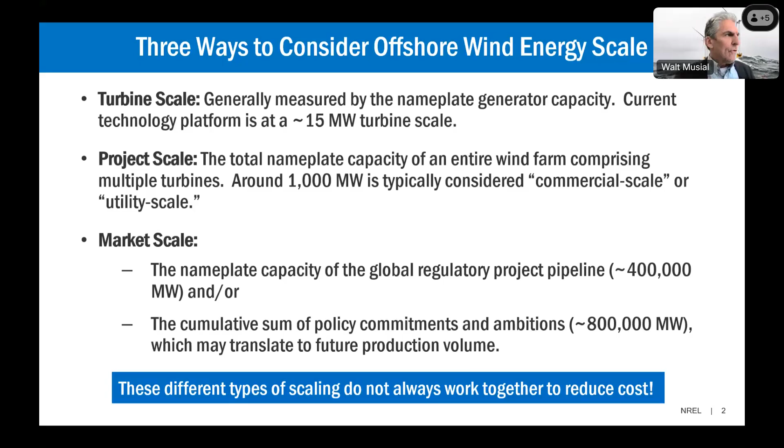The first one I'm going to talk about is turbine scale, and maybe touch on the history quickly—I could spend a whole hour talking about the history of turbines because I lived through a lot of this. But this slide reminds us that we've done a lot of upscaling, and the upscaling that happened in the past has been amazing.

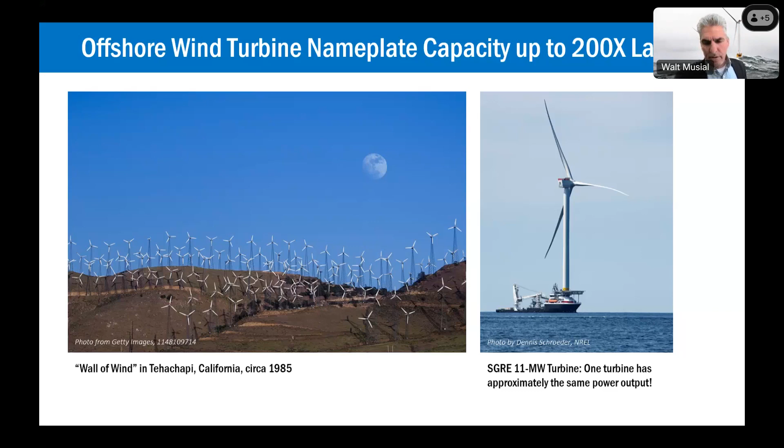Looking back at land-based wind, this chart on the left shows the capacity size increase of land-based machines. It does look like the machines keep increasing over time, but those increases have been fairly marginal, and the scale settled out around 2 megawatts. As shown in the picture on the right, the infrastructure to move large components to build land-based wind farms was constrained by bridges, the road system, and the cranes needed to install those machines. So we leveled out around 2 megawatts, though that increase has crept up due to optimization—slightly larger rotors, higher hub heights, and low specific power machines.

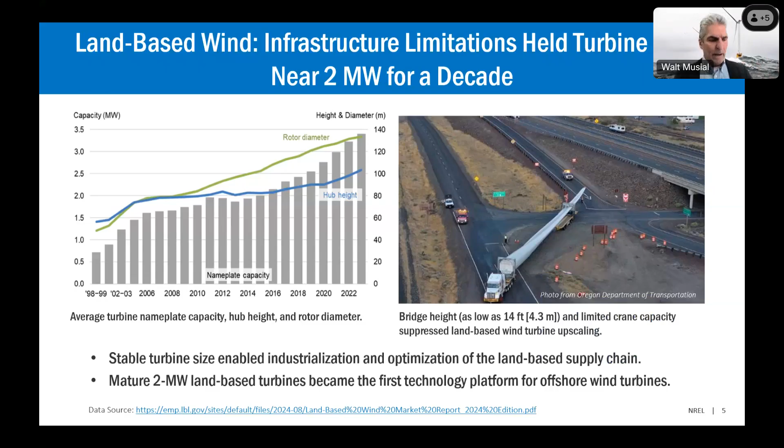That stable size allowed the land-based industry to industrialize and realize the maturity of the product lines they've been delivering. But those products also became the first technology platform for offshore wind machines back in the early 2000s. I'm going to talk about that concept of technology platforms for a minute.

For 24 years, since Middelgrunden, when 2 megawatt machines were deployed offshore in Denmark, we've been commercializing the 2 megawatt machines on the first technology platform—a definition NREL uses to think about the steps we take going from one configuration and size envelope to another. Our definition is really the envelope of turbine technology and the proportionate infrastructure and supply chain scales necessary to support the manufacture, installation, and service of that sector of the industry.

So if the turbine size increases, so does all that supply chain and infrastructure—it all has to happen in unison. The industry has depended on and relied on each other to go from one step to another. We have Platform 1, based on the land-based 2 megawatt machines, which grew to the Siemens 3.6 megawatt, one of the most prolific machines ever made.

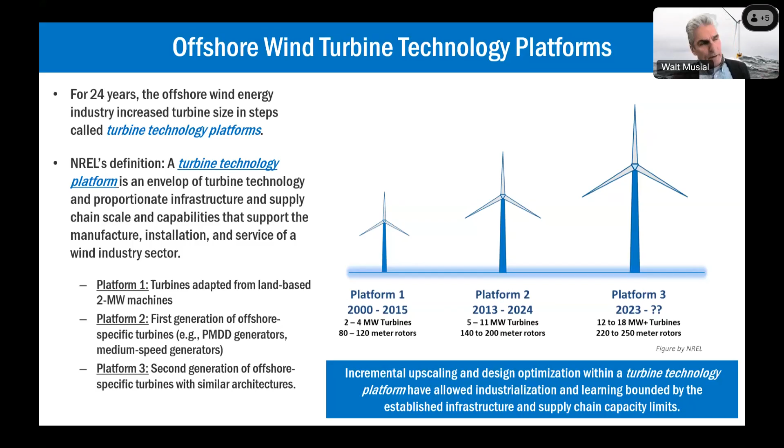You can see there's a parabolic relationship there that goes into the present day, where we're now approaching a point where all the projects are committing to these 15 megawatt turbines that are just reaching the commercial stage.

The caution here is that while land-based upscaling slowed because of land-based infrastructure, offshore we didn't have to slow down because there was no constraints until now, since the infrastructure is being built, but there are limitations to how that infrastructure can further be developed to increase for further upscaling.

In the United States, there's even greater limitations because we never built Platform 2 - we're starting from scratch to build the 15 megawatt platform. So a lot of that infrastructure is more expensive. And we have the Jones Act, which limits our options in terms of vessels - we have to have US-based vessels. So that Platform 3 turbine platform is still being built.

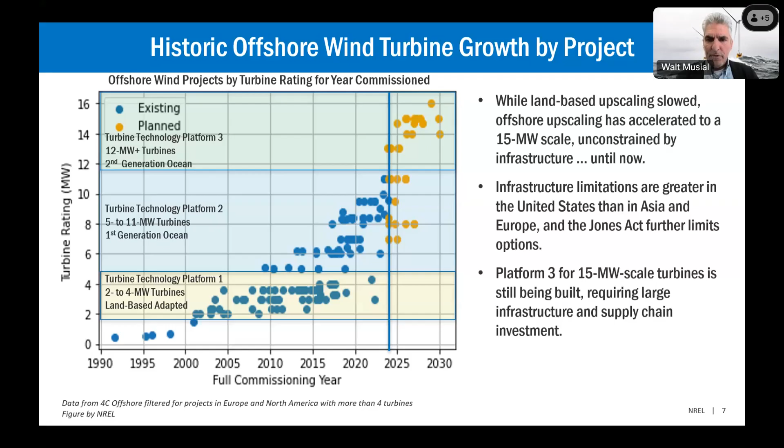And I need to make take my box away. Here it is. Sorry.

So we're still building this platform, and these are the turbines that are serving that platform. All the main manufacturers of turbines - Siemens Gamesa, GE Vernova, and the Vestas 236 15 megawatt turbine - are the main turbine manufacturers and turbines that will serve the projects of the United States in the next round of projects.

These turbines were enabled by technology advancements over the last two decades which we're all aware of. They aren't all wind energy advancements - some of them are just technology advancements with computer technology and lightweight materials, innovations in manufacturing, and load control from controls that we became proficient at, and diagnostics for remote sensing and things like that have all led to this generation of turbines, which we're building now and will serve the industry well, I expect, in the future.

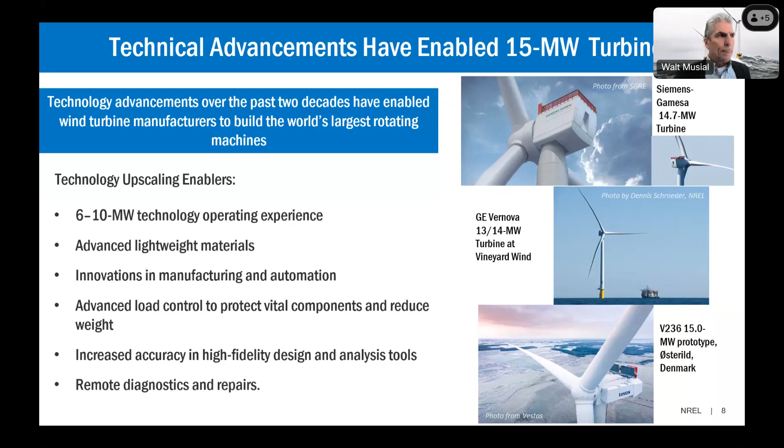We also see that these reduced costs help developers win competitive procurement bids by bidding in with the larger turbines, and this has been going on for 10 years now. In Europe and in the United States it's kind of following true, where the larger machines, even though they don't yet exist, are helping developers win bids because they can bid in with the larger machines at a projected cost, and then those costs get turned into the prices that are negotiated in the power purchase agreements.

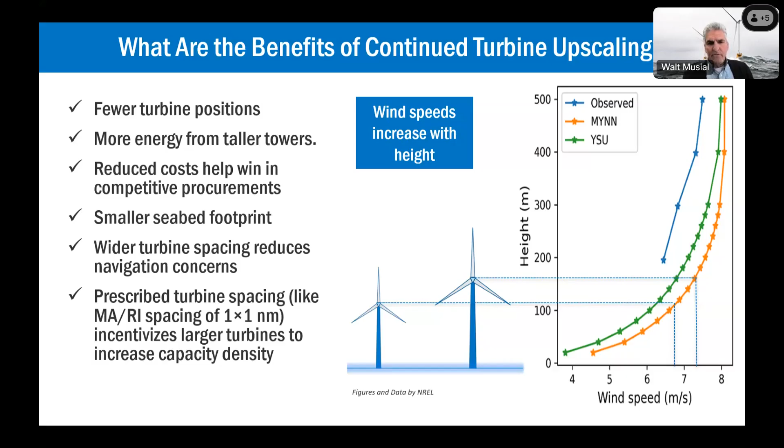We also see smaller seabed footprints, which means the turbines are wider apart, and some of the navigation concerns can be alleviated or mitigated, especially in places like Massachusetts and Rhode Island lease areas where turbine spacing was prescribed at 1 nautical mile. The larger turbines are the only way that we're going to increase the capacity density of the project, because the turbine spacings are fixed. So we're seeing that as a motivation to go to larger turbines.

But let me talk about what are the concerns of further upscaling. The first one is really talking about an old and well-known law of physics, called the square cube law. There was always this fear that because the turbine's energy output increases by the square of its rotor diameter, the turbine's weight is actually increasing by the cube of the diameter. So the turbine's getting heavier faster than it's making more energy.

That law of physics is being defied and offset by technology benefits that have been included in the development of these larger machines. But putting that aside for a while, as you get to larger and larger machines, we haven't found any hard limits that would limit turbine scaling, but there may be economic and practical limits that need to be considered. First of all, diminishing returns on reduced turbine positions means that as we get to larger and larger turbines, the percentage gained from going from one level to another is smaller.

We also see that the turbines might be getting more expensive because of the square cube law. The heavier turbines mean more expensive turbines, and we don't have good data on this, but that's one of the things to be concerned about.

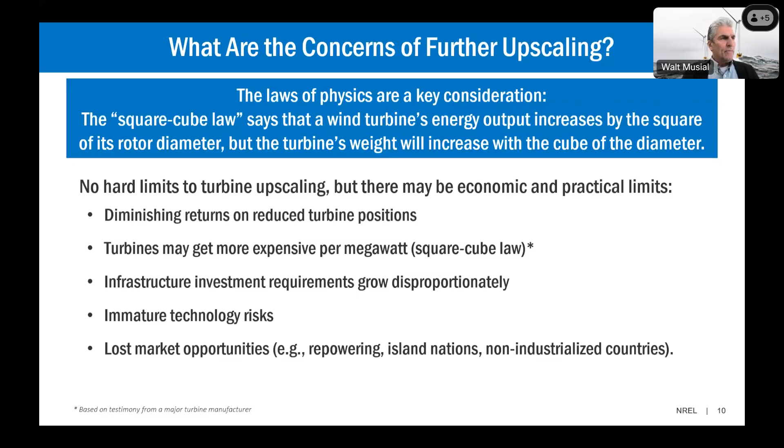So we may be limiting ourselves in some places where, if, say in 20, 30 years, we want to repower these foundations, if the turbines don't exist to do that, we can't reuse the infrastructure. Or island nations where they just don't have access to large ports, or non-industrialized countries where the development of those ports and vessels are probably unfeasible. So we have to consider that as we go.

This is an example of what I mentioned just a minute ago, which is the diminishing returns. You see that there's two lines vertically on this chart. One represents the 2 megawatt turbines that we started out with, and we came all the way to the 15 megawatt machines. Going through that upscaling, we gained about 7 times fewer turbine positions than we had at the start, say a Horns Rev type project.

That kind of gain was significant, and it resulted in a large capital benefit, as shown on the right. But if we go to a larger machine, say a 20 megawatt machine, the gains are just a fraction of that, and the risks can be a lot greater.

So I think my conclusion was that most of that low-hanging fruit has already been picked. We did really well getting to the 15 megawatt. The question is, should we go beyond that now, and is it worth it? There's a lot of reasons to consider that possibility.

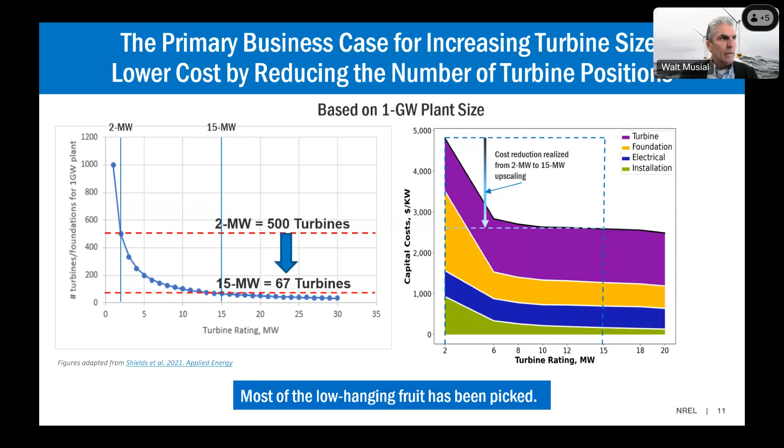One of the biggest reasons is the infrastructure costs. We're just kind of coming to terms with this right now, but all aspects of the supply chain are dependent on turbine size. It's not just the turbine itself. There's the port infrastructure, the regulations and standards that need to be updated, the service and operation equipment, and the grid and electrical infrastructure to some degree.

And then the manufacturing supply chain and the businesses that have to relocate and put their wharfs and access to the ocean into maybe expensive or less available real estate.

So in just one example, the Oceanic Network estimated that there would need to be $36 billion of investment going into ports and infrastructure to build this next platform of 15 megawatt machines in the United States. That's a substantial investment, and those are investments that are not part of the LCOE calculation that the developers have to make, and it's not under their control to make them. So we have to make the market appealing enough to investors for those $36 billion to come to fruition.

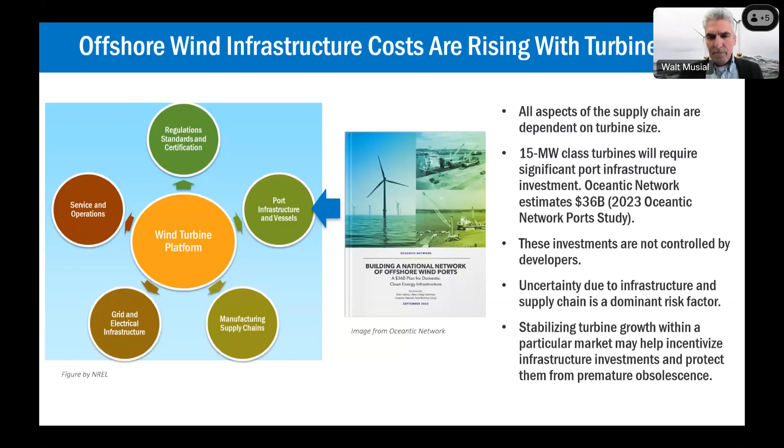So I'm going to use an example of another industry, which is the aircraft industry, to maybe use this as a cautionary tale. They've been working on jet airplanes for much longer than we've been working on wind turbines.

But the 747 was developed in the 70s, and we always thought, oh wow, imagine how large airplanes will be by the time we get to the 2000s. Well, that really never happened. The 747 didn't get any bigger, and the A380 was really the largest passenger commercial airliner.

Both of those jets have been discontinued because jumbo jets like this require large infrastructure to operate, and in particular, they required over 3,000 meters of runway space just to take off from airports, which limited where they could go. Smaller planes can serve regional airports where many passengers want to go, and the aircraft industry just wasn't able to fill the big jets. So the airport infrastructure favors the small aircraft.

But we still need the larger aircraft for other things like international flights, cargo, and to serve major hubs. In reality, what has happened is that the aircraft industry has moved to a diversity of aircraft to serve diverse global markets. If I just put up the fleet of United Airlines airplanes, they range from the 777, which is slightly smaller than the 747.

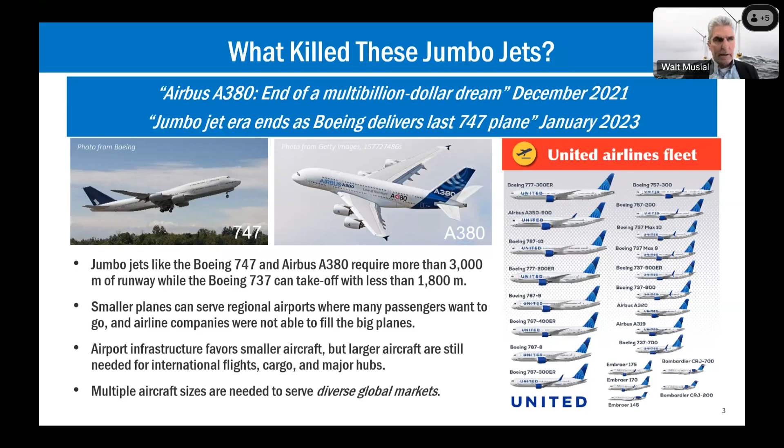So I'm going to move back to offshore wind. Here's another representation of the historic deployment of offshore wind turbines over time, representing the three platforms I just talked about. The yellow bars are the smallest platform, platform 1, adapted from land-based machines, the 2 megawatt to say 4 megawatt machines.

The blue bars are the platform that evolved from the first generation of offshore machines, starting with the 5 megawatt machine and up to arguably the 11 megawatt machines. The dividing line really was when GE deployed the first prototype in Rotterdam to start the process of the 15 megawatt class machines, which are the green bars. Most of that's in the future.

But also on this chart is the cost curve that shows costs were rising continuously until 2015, and then they started to come down, and we started to realize the benefits of this upscaling. But if we dissect it carefully, the commercialization of that 6 megawatt scale, platform 2, was partly responsible for generating that cost decline. But we also saw that the maturation of the supply chains for the 2 to 4 megawatt was really going.

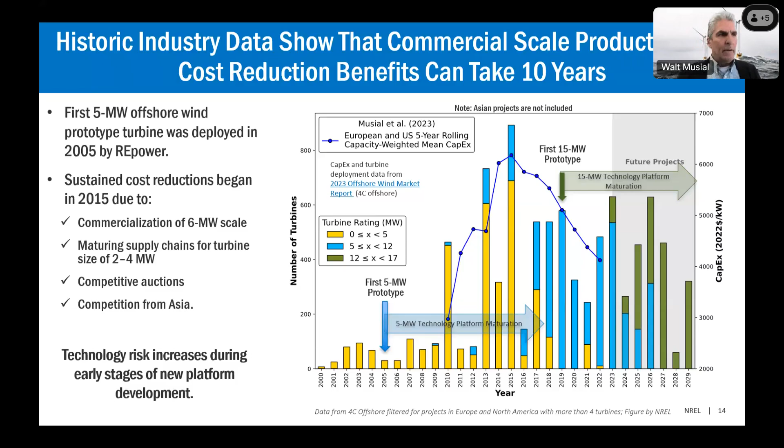We're kind of going through a process now where the 15 megawatt technology platform is beginning to go through that process of technology maturation, which started in 2019, and it's continuing now. Of course, we have the experience of the previous platform to build on, but there's still a lot of learning to do with the infrastructure, the logistics, and the turbine reliability that needs to still happen. And we'll be seeing that as we go.

So I want to talk about those technology risks in introducing new technology. New turbines are more likely to have design and manufacturing oversights or defects because they haven't been tried yet, and we're building all new factories with new workers. There's construction risk because there's new logistics, ships, and new ports that have to be developed, and the logistics depend on the on-time arrival of this new infrastructure as it's being built.

The supply chain is kind of the same way. You have new supply chain facilities that need to be built, and the vulnerabilities increase as the turbines get larger because the investments that have to be made into the supply chain and infrastructure system get greater. Now you have to locate those factories, which are much larger, on an ocean or body of water where you can ship them from, and the number of suitable manufacturing locations are getting more scarce.

So as you introduce this technology, the safety risk could also increase because there are situations that arise that are unforeseen, and those hazards could introduce safety risks as they have to be encountered without a procedure in place to deal with them. Operational risk is the same. You have field reliability problems that could arise due to the lack of understanding of the new technology, and those could result in higher failure rates.

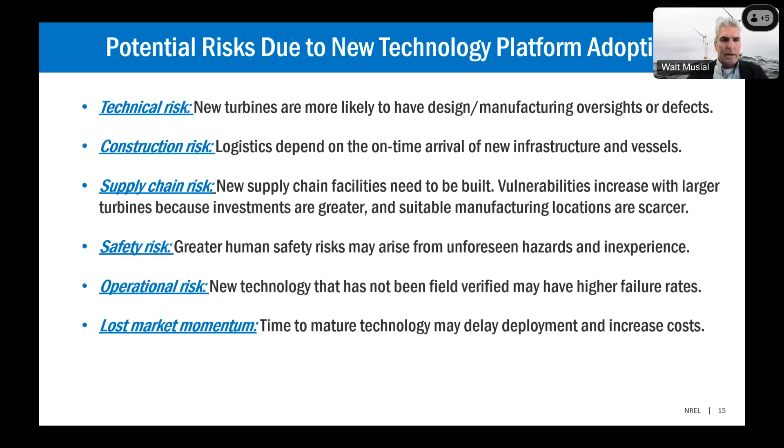The last point is that the time it takes to mature a technology can cause potential delays in deployment and increased costs, which could slow the momentum of the overall market. So we need to consider these things, and I want to pivot now toward what I think is the big advantage to maturing the technology rather than continuing to upscale it.

I have an example that I created based on my experience, worked through with a bunch of people. I've divided this into five stages, and I imagine this might be controversial because experience from other OEMs might be quite different. This really translates to the turbine, but it applies to the entire development of a new technology platform.

You start with the prototypes—really before the prototypes, since some bidding on projects happens before a prototype even exists. But the prototype gives you visibility that the technology works. It's a proof of concept, and type certificates are generated based on the prototype. If you're familiar with the technology readiness scale, all prototypes would be TRL 9, the highest level you can reach. So none of the stages after that go beyond TRL 9—I just wanted to put that in perspective.

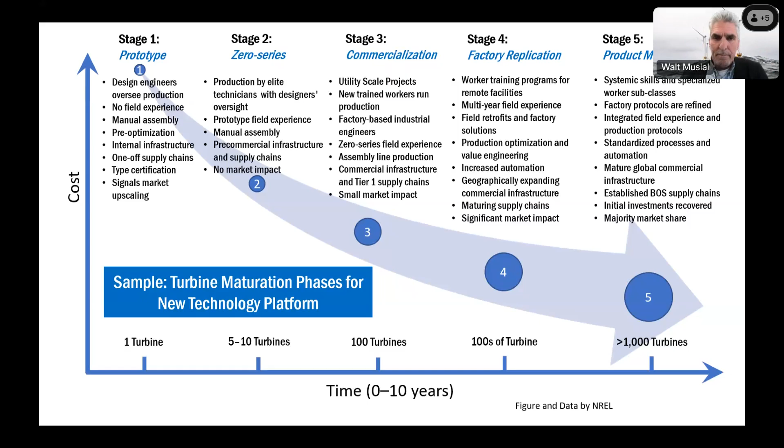Now I'm going to talk more about project scale, an important concept we've already seen in a lot of projects. Comparing this to Block Island, a 30 megawatt project—that project will be more expensive no matter what because it's just smaller, and a lot of the equipment can't be amortized over other parts of the project.

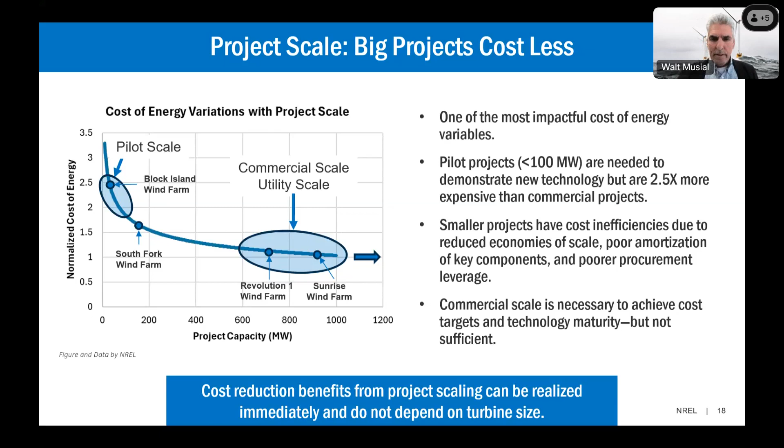When you go to South Fork, you're already much better off because the project size is 4 times bigger than Block Island, but you haven't really reached commercial scale yet—which we're now seeing in the construction of Revolution 1 or Sunrise, big projects at what I'd call utility scale, where you benefit right away from the size of the project. That doesn't mean the technology is mature yet; it just means you're taking advantage of project size to bring costs down. There's still a long way to go to reach technology maturity, and that's the next section I want to talk about—how do you get to technology maturity?

In order to get there, you need the market size and market visibility to verify and validate to investors that the volume of production will be there. The figure shows some substructures from Principle Power, but you need sufficient market scale to attract the investments necessary to build the infrastructure and supply chain to reach that commercialization stage. Technology maturity comes from industrialization of the supply chains and the massive field experience and sustained innovation you get by building a lot of these machines. So market scale needs to be large enough for investors to recover their investments and feel it will be sufficient to do that.

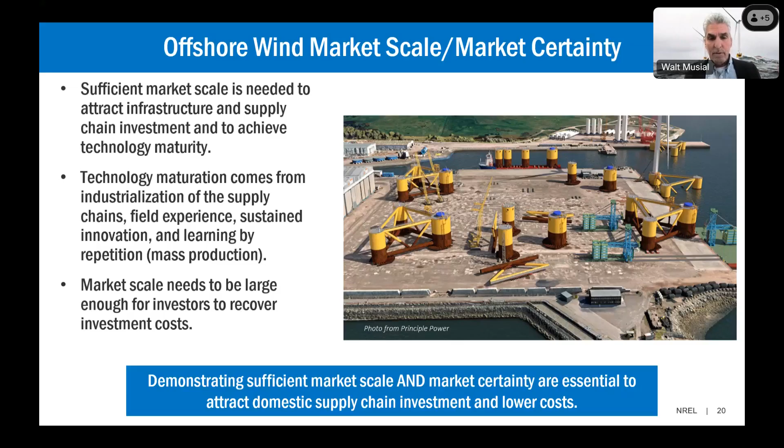When I make this argument, I look to the global market. One of the numbers we use, quoting TGS Market Intelligence, is that there are 807 gigawatts of commitments, or what they call ambitions, in the world market, where countries or states have committed to building offshore wind, either in hard commitments or soft targets. That's a big number, 807. It's a big market if it comes to reality.

Through our market report that NREL did, we calculated there are actually 454 gigawatts in the project pipeline globally. If you just focus on the United States, we calculate there are 80.5 gigawatts in the total US pipeline, with 65 projects shown in the maps on the right side. When we did our study this year in May, we only counted projects actually commissioned and online. There was only 174 megawatts installed so far in the United States, but there's 7.5 gigawatts approved now, and multiple gigawatts under construction.

We were out looking at some of that. There's about 20 gigawatts in permitting, but we look at the hard procurement mandates made by the states—there's 45 gigawatts of procurement mandates in 8 eastern states. That's a pretty good market scale to lean on. If you add up all the commitments as well as the soft targets established by various states, like California with 25 gigawatts on their planning target, you get about 115 gigawatts of mandates and soft targets, which is a big enough number to say we're going to have a market capable of maturing this technology.

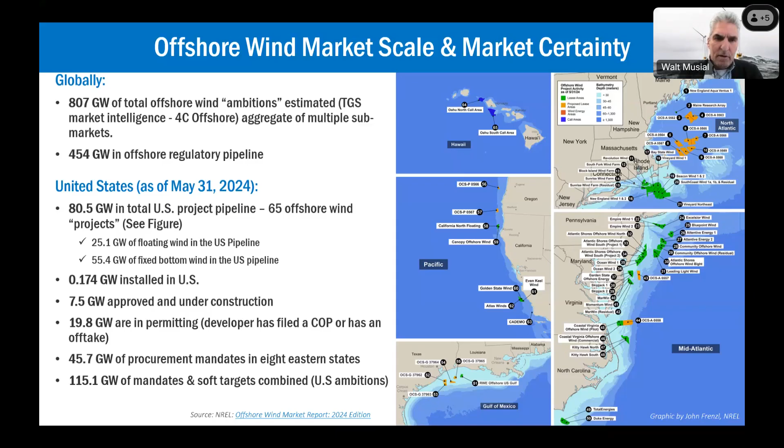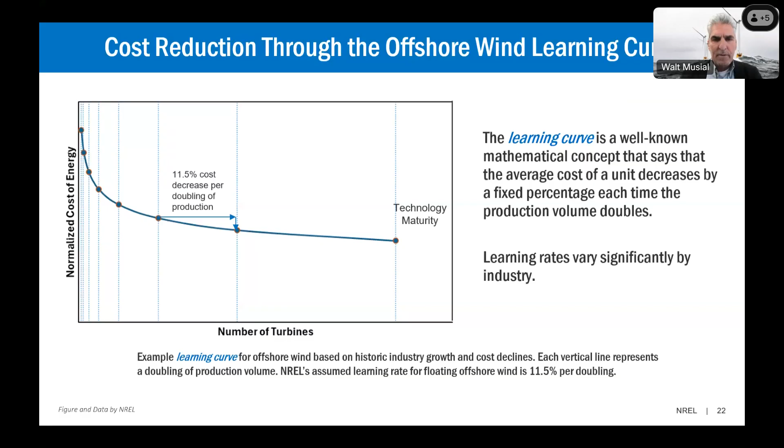To get to this technology maturity, we have to work on this learning curve. I know when we say learning curve it sounds like a cliché, but it's actually a well-known mathematical concept: the average cost of a unit decreases by a fixed percentage each time the production volume doubles. In this case, I'm thinking about the number of turbines made on a particular platform—so if we go from 100 turbines to 200 turbines, that's one doubling, and so on. This curve shows that trajectory mathematically as we go down using a learning rate of 11.5, based on some analysis NREL did. This is just a conceptual look at how costs can come down through technology and maturity.

I'll give you a few examples from other industries that have done this already, some far beyond what I think wind can do. Here's LED lighting, which everyone's familiar with—the gray bar shows the market share, and pretty much everybody's house has LED lighting now. Those costs have come down from $12-$13 down to about 86 cents, shown here through 2019. So in just 10 years, they reduced their costs from $12 to about 86 cents—a huge drop, done through just a huge volume of production.

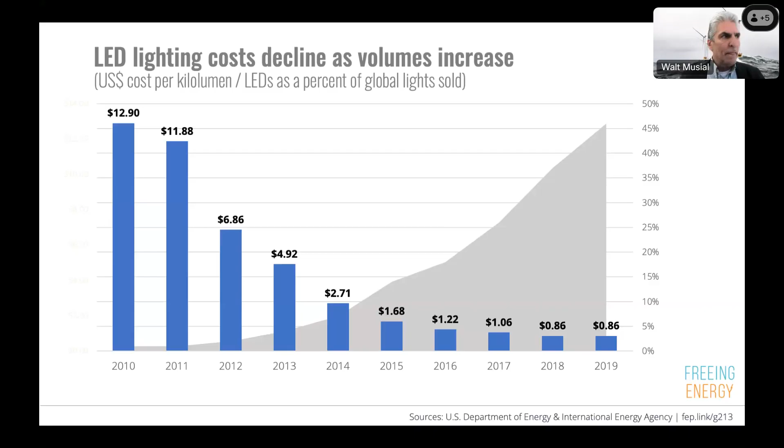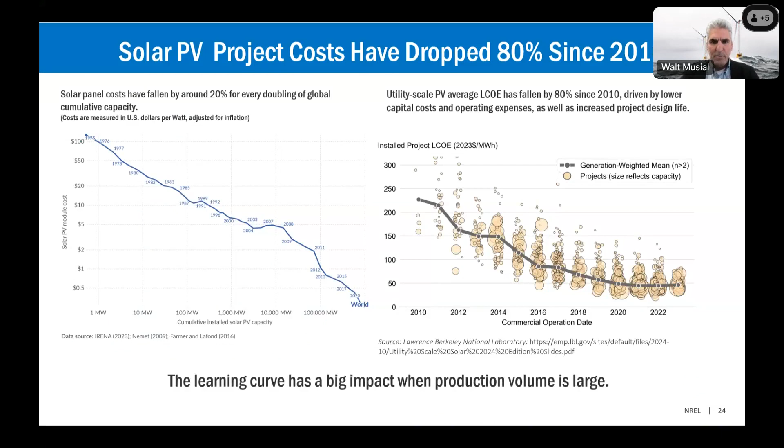Here's another example, maybe closer to home, which is solar PV. Those prices have dropped 80% for projects since 2010, based on the large drop in production costs of silicon solar panels, which have now made solar one of the cheapest energy sources, competitive with land-based wind on the market.

The reason I like the comparison is because the displacements, the draft, the length, the spacing of the buoyancy columns, the cost, all kind of are on the same scale as the floating platforms for the 15 megawatt machines that we're building, or we would like to build today. And so this is a great comparison. If we built 2,700 platforms of 15 megawatt floating turbines, we'd have 40 gigawatts of deployment.

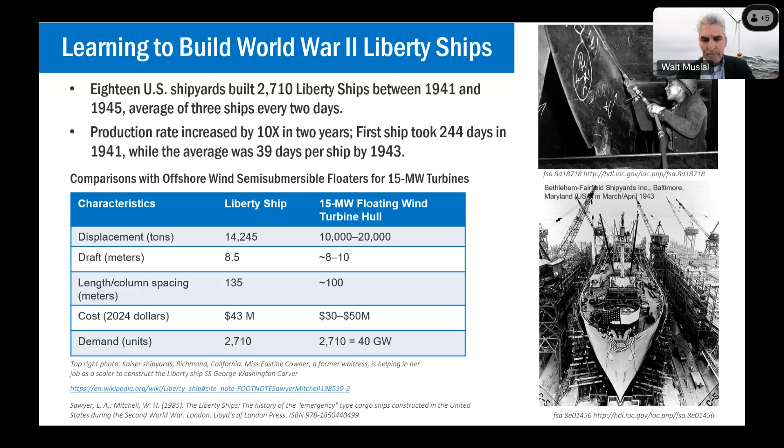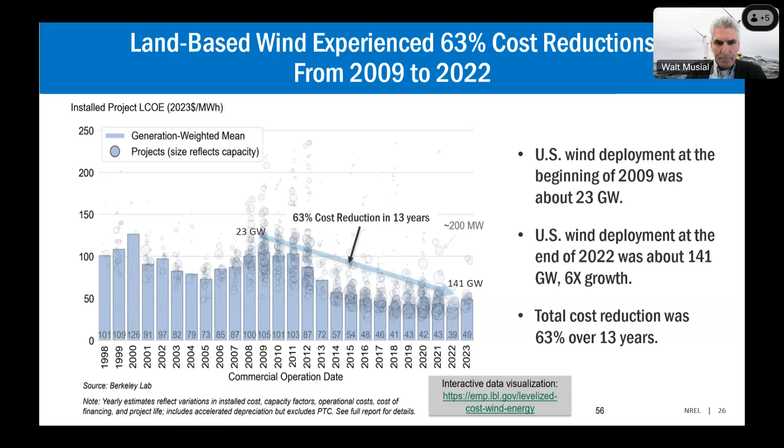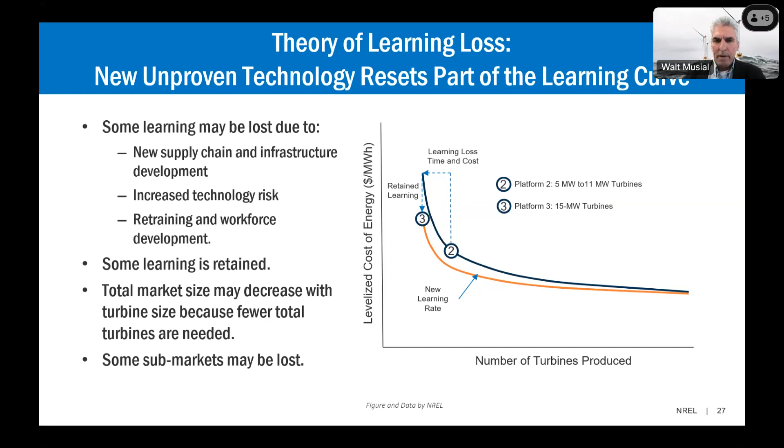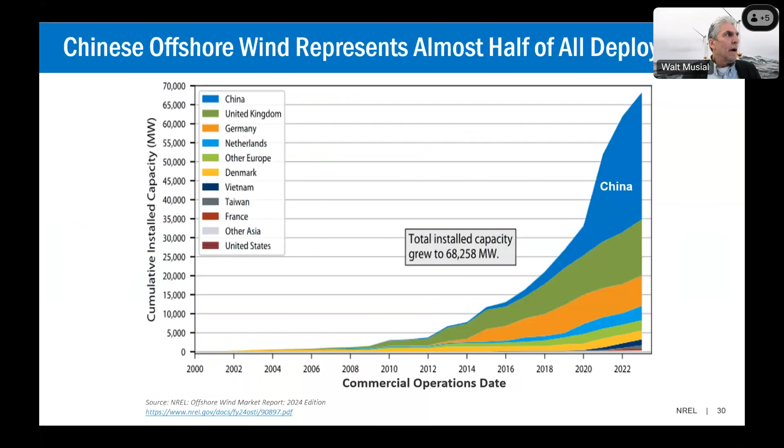So when I look at the Chinese market, first we have to look at and compare their capabilities to the US and to other markets. The Chinese market is approximately, it could be 20 times greater than the United States in terms of its infrastructure requirements, and I base that on some of the details we have. There's not a lot of hard information, but for one example, their ports and infrastructure are just cranking out ships. They have 20 installation vessels under construction now that can lift these big machines. Some of them can, at least.

And the US has only one ship that can lift a 15 megawatt machine. China has this top-down approach, where a lot of these companies are state-owned, and they've integrated their military and civilian shipbuilding, so they're keeping the ports busy all the time. At least in 2022, according to the UN, 92% of global shipbuilding came from either China, South Korea, or Japan, and this was dominated by China.

China makes 60% of all the offshore wind turbines in the world, but 99% of those go to China. They're not exporting them; they're putting them in Chinese waters.

So what does that mean for the US? Likely we're not going to be buying Chinese turbines at all in the US. In Europe, though, the markets seem to be softening, and there's some concern that maybe Chinese turbines could displace some of the European manufacturing. That's something I'm not an expert on, so I don't know if that's really going to happen. But I do know that to build and install a 20 megawatt turbine in the United States, it will be difficult if it's outside of Asia. Especially in the US, we don't have the ships, we don't have the ports that could do that. The new ports being developed right now have some headroom, but maybe not all of them have the same amount, so that has to be weighed.